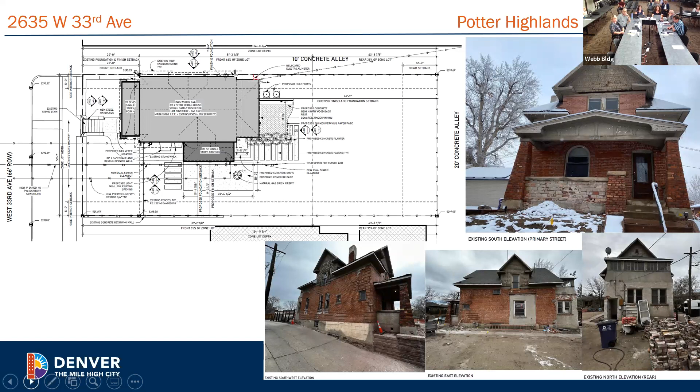Here you can see a site plan showing the location of the 1-story addition, as well as photos of the existing condition of the home. The commission previously heard the application on June 20th and asked the applicant for additional information about the proposed brick veneer.

Here you can see the proposed elevations for the alterations to the home as well as the addition. The applicant is requesting to make several alterations to the property, including replacement of windows damaged beyond repair, addition of a brick smear to match the existing damaged brick, and replacement of cedar shingles where damaged.

So additionally, the applicant is requesting to add a small 1-story side addition to the elevation of the contributing structure. The applicants will be demolishing a small portion of the elevation wall within the 1-story side addition. The portion being demolished is where previous alterations have occurred and is currently attached with new block infill.

The new addition will not damage the existing cladding material on the contributing structure. It will be clad in smooth composite paneling and stacked bond dark red brick.

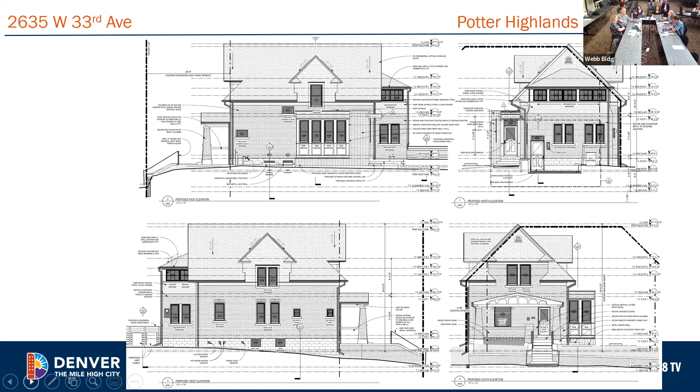Per the commission's request for more information, the applicant has indicated a type O premixed color mortar for the brick smear, which you can see here on the left. They've already tested it on the house, shown on the top left, and provided photos of the previous conditions and repair work already completed. The application also includes a history of this method, the various names it is known by, and the reasoning for why this was the chosen material.

Staff is supportive of the brick smear, and one thing we'd like to point out is that in the application the material should be called out on the materials page. That was a condition from staff, and staff is willing to ensure the material page is highlighted in red, and we are now working with this.

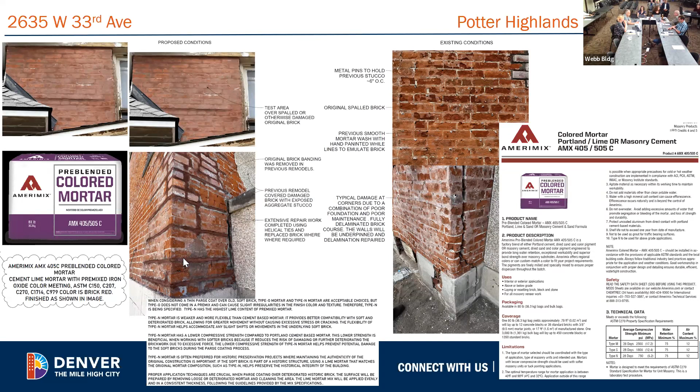Any other questions? Thank you. Now we can open it up for public comment if there's anyone here in person or online who would like to comment on this project. No. Okay, staff, Jesse, do you have any summary? Okay.

Then I think we can move into deliberation. What do you all think? I think first, thank you for all the helpful information. I know last time we were asking questions, and I think this answered a lot of the questions we talked about. So I'm curious to hear what others think, but I really appreciate you taking the time to do that.

Yeah, I was not in the meeting when we first saw this project, but I definitely appreciated the very thorough explanation of why this seems to be the best approach, and it kind of tracks with my understanding of best practices for preservation, particularly when you have very deteriorated brick masonry like this. So thank you.

I'm supportive of staff's recommendation. Agreed, I agree. Given the condition of the brick, there are not a lot of options to figure out how to address both the preservation of the original material and maintain the architectural character.

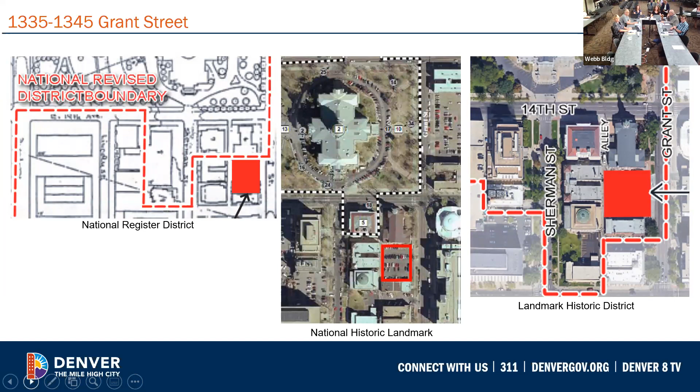Did you do it for me?

Okay, thank you. So the Landmark Preservation Commission previously reviewed a submittal for phase 1 mass, form and context on May 2nd, 2023, for a 12-story building that is shown on the left of the screen. The commission denied this application with the following comments. You stated that the application did not meet guideline 4.23, including building widths, stating that 4 to 8 story buildings stand on their own in this district, and this proposal does not. The commission felt that the application created a street wall that was out of context.

The commission also stated that a taller building could be constructed in this location, but the application needed to focus on the street wall and building space and massing issues. They also stated that the proposal blocks the sky from many different viewpoints, and that the design did not respond to the district. Stated that the design massing height needed to better fit within the context, and the commission recommended that the proposed building give space to the surrounding buildings in this district.

Many of you stated that the 12 stories was overwhelming in this location and cited specifically guideline 4.4 and 4.1 and 2. You cited guideline 4.4 for height and massing in the surrounding block context, and stated concerns over the impact on the individually landmarked church, and that the building could potentially overwhelm that individual landmark. You were supportive of the use of balconies on this residential structure, but recommended restudy of the balcony materials, potentially recommending the use of glass or a clear railing material.

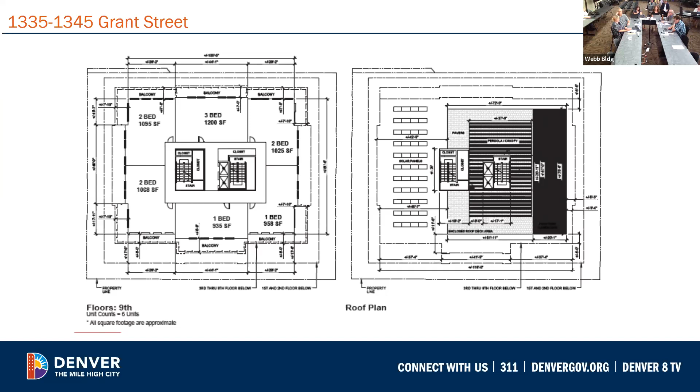The new building will be set back 10 feet from Grant Street, consistent with 1329 Grant Street, known as the Adams at Grant, and 230 East 14th Street, the individually designated First Baptist Church of Denver.

The building will have a 10-foot side setback from the First Baptist Church of Denver, and the Adams at Grant buildings to the north and south, fitting in with the range of setbacks in the immediate area. The new building will also have a 1 foot 5 inch setback along the alley, which fits within the range of setbacks in the immediate area.

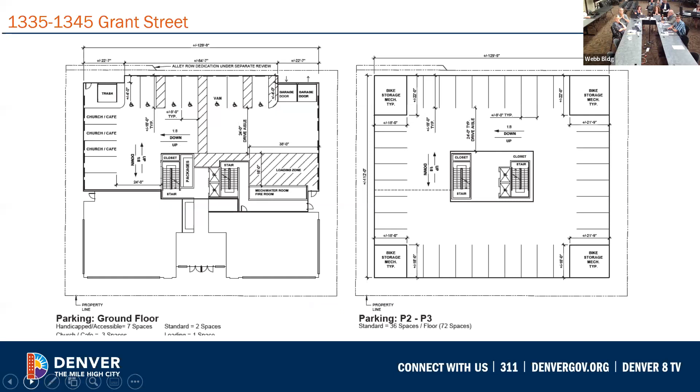Let's go through the floor plans again for your review: parking, ground floor, second floor, then floors 3 through 8, and then floor 9 and the roof plan.

The building is designed in the neoclassical style. The proposed design draws from existing neoclassical and Art Deco buildings in the district, particularly the strong vertical detail similar to the State Services building, cornice and horizontal banding, and classical elements like those found on the Colorado State Museum, and a prominent entry bay similar to those found on the State Capitol Annex.

The applicant has significantly revised their compatibility study so that it better illustrates where they're drawing their designs from and shows how they're trying to fit within that context. There are additional pages in the application packet showing this context study, but here are just a few of the images showing where they're drawing their design ideas from.

The new construction will be approximately 114 feet in height to the 9th floor, with a total of 9 stories. This is a reduction in height of 36 feet and 3 stories from the previous submittal. The applicant did include the height of the rooftop appurtenances, raising the total building height to 126 feet. They have clearly defined floors 1 to 2 as the base, 3 to 8 as the middle, and floor 9 as the cap.

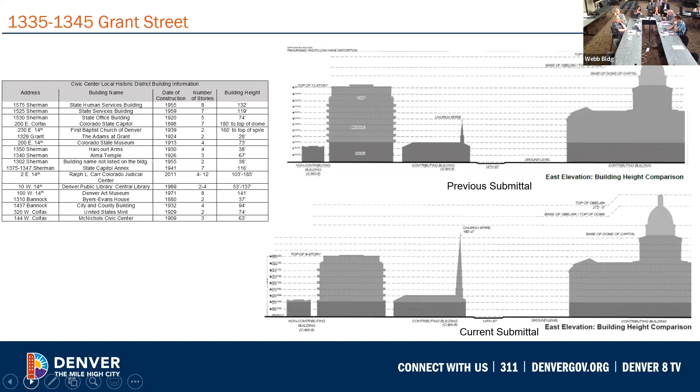Here you can see the previous submittal showing the height in comparison to other buildings surrounding the structure. On the bottom right-hand side, you can see the current proposal, which is significantly lower in height and better aligns with the street wall along Grant Street, and does not exceed the height of the steeple on the Baptist church.

So the East Grant Street side of the building facade features a glassy storefront first floor with anchored corners, while the second floor has a band of punched openings. The building base is broken up into 3 bays, including a central recessed entry bay with projecting canopy flanked by pilasters and storefront bays. The base is clearly defined and is capped by a cornice.

Staff feels that the proportions, height, and layout of the east elevation base better relate to the immediate surrounding context and provides more of a pedestrian-friendly scale than previously submitted.

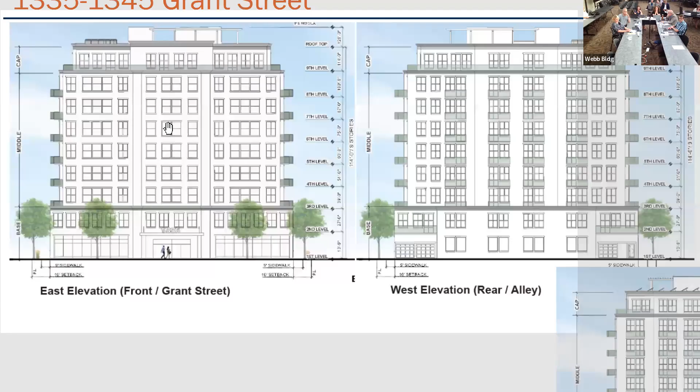The east elevation's middle features strong vertical detailing, punched window openings, regular window rhythms and layouts, and a clearly defined cornice typical of other buildings in this district.

The building's middle is set back from the base, approximately 11 feet 6 inches to 6 feet, providing visual relief from the building's base. The middle is broken into 3 bays with a central bay flanked by pilasters that align with the pilasters on the building's base.

The center bay is set back 6 feet from the building base, and the side bays are set back 11 feet 6 inches from the building base.

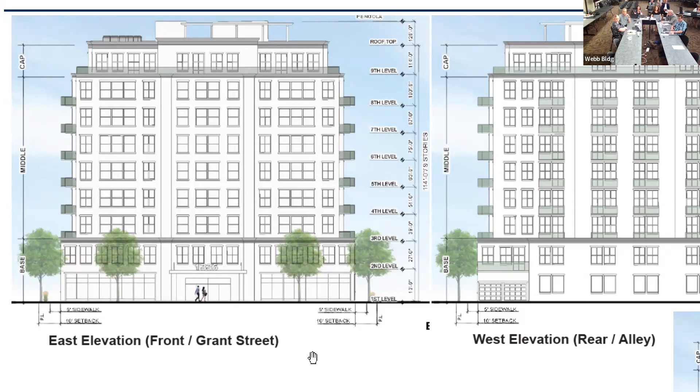The east elevation features single, paired, and triple window configurations, all of which are found in the district, particularly on the residential structures of this district. The applicant has redesigned the window proportions so that they better relate to the other window openings found in the district as well.

The building's cap is set back from the middle, approximately 8 feet 9 inches to 6 feet. The building's cap is broken into 3 bays with a taller central bay flanked by two side bays. The central bay is set back 8 feet 9 inches from the building's middle, and the side bays are set back 6 feet from the building's middle.

The building's cap features a cornice that wraps the building, and staff were initially concerned about the center bay stepping up in height, but ultimately we made the determination that after reviewing those building perspectives, the cap would have a minimal visual impact. It wouldn't be very readily visible from public vantage points because it's so high.

And the building's cap features single punch window openings and doors with proportions and rhythms that relate to the rest of the buildings in the surrounding context.

I'm just going to kind of group together the other three elevations to save a little time here. So the north, south, and west elevation bases are composed of 2 stories, matching the east elevation. The northeast and southeast corners of the first floor feature a partial continuation of the storefront windows seen on the east elevation, while the northwest and southwest corners feature garage doors.

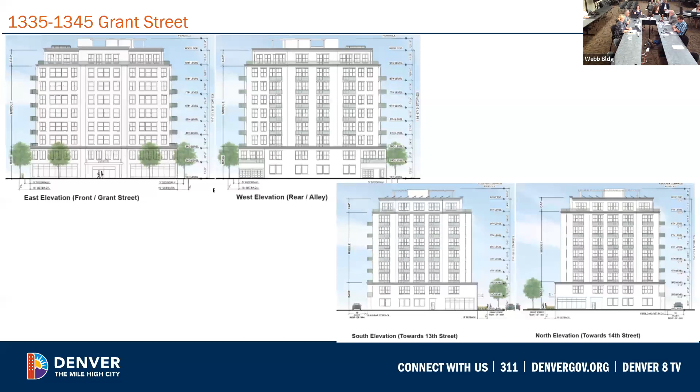So staff is recommending approval of the application, citing guidelines 4.1 to 4.5, 4.8, 4.22 to 4.28, 4.3, intent statements 4A, 4B, 4C, 4G, 4H, 4I, Denver Civic Center Design Guidelines 4C.1, 4C.2, and 4E.3, presented testimony and submitted documentation and information provided in the staff report.

Thank you, Jessica. Do you have any questions for staff?

I did have just one. Yes, ma'am.

I'm assuming that your recommendation for approving the application is for this phase 1. Correct. Yes, they will have to bring back phase 2 design details at a later meeting.

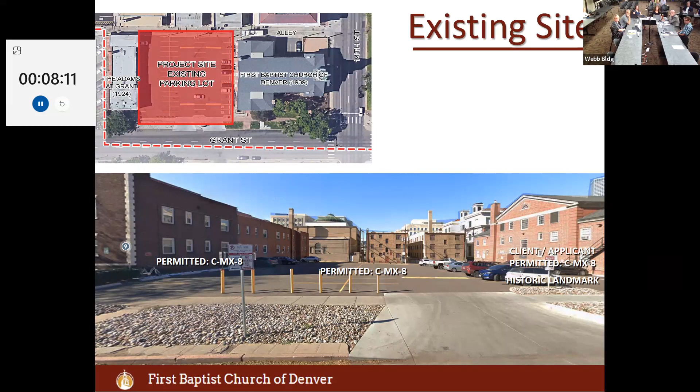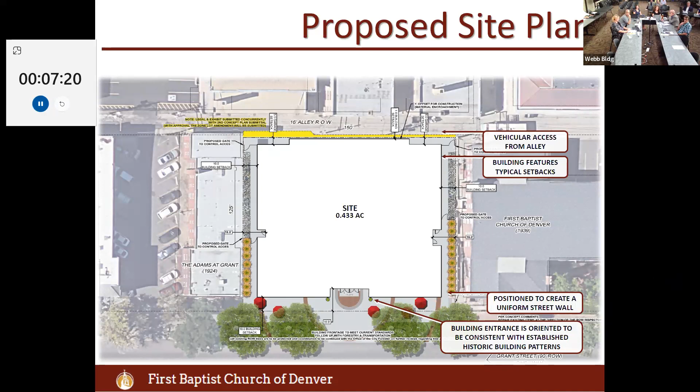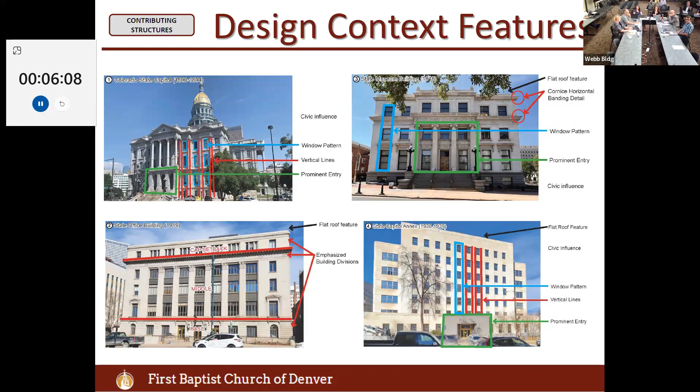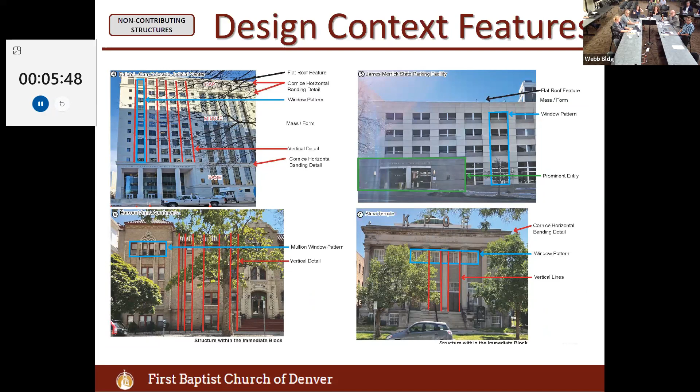Next slide, please. So these were some of the non-contributing, but they still provide design context with the vertical elements, the pilasters, the window mullions, openings, things we just covered previously. As we go to the next slide, you'll see how we overlaid those on top of the elevations. I think everybody in this room reads plans for a living, I've been doing it a long time. I still like 3D, but for the purposes of this slide, it's really helpful to see how those vertical elements work respective to those pilasters, punch windows, the horizontal banding with the cornices, our base facing Grant Street with the recessed entrance and the protruded awning, and then the activated street frontage along our building wall oriented toward Grant.

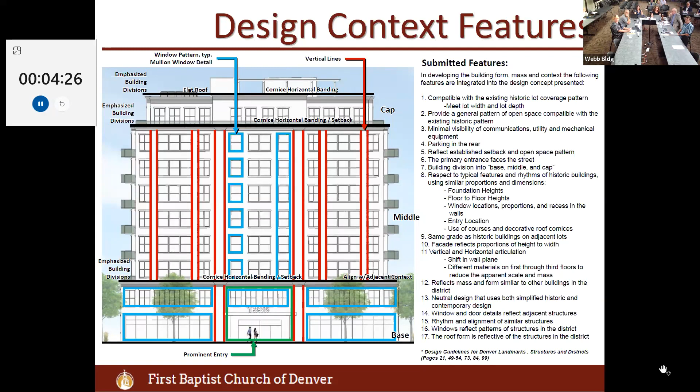Next slide, please. There you can begin to see that context of how the first floor is right up at the build-to line, but it's in keeping with adjacent properties, creating that defined building wall. The middle, which is 3rd to 8th floor, steps back, but the three bays discussed repeatedly through Jesse's presentation - you'll see how that middle and cap protrude, as does the entry. So it really plays to the simplicity, scale, and proportion of the building context.

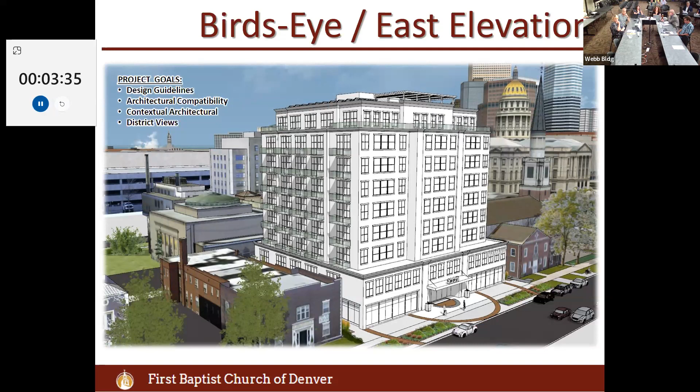Next slide, please. Here you can see how that building wall works with the streetscape. For the purposes of this presentation, we took out any street trees that would ultimately be there from a landscape architecture perspective, but the main thing we wanted everyone to see is how that recessed entrance is prominent with the pilasters flanking it, and then the store frontage on either side, along with the canopy that extends. With the scale of human beings walking along there, you can see how that two-story base really does work much better.

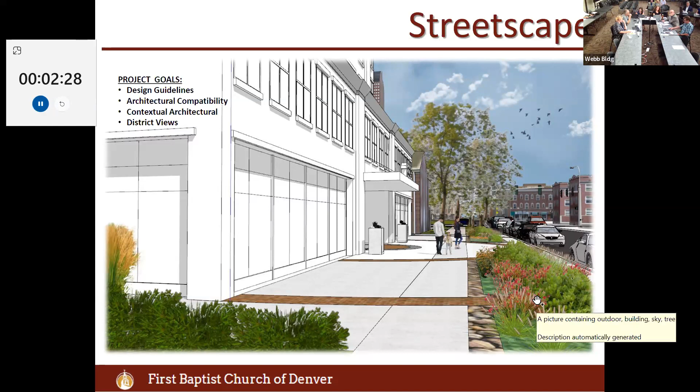And it's always disappointing when somebody doesn't like what you had, but frankly, your commentary from our last presentation to today, we took to heart. And I think in the end, it's a better project.

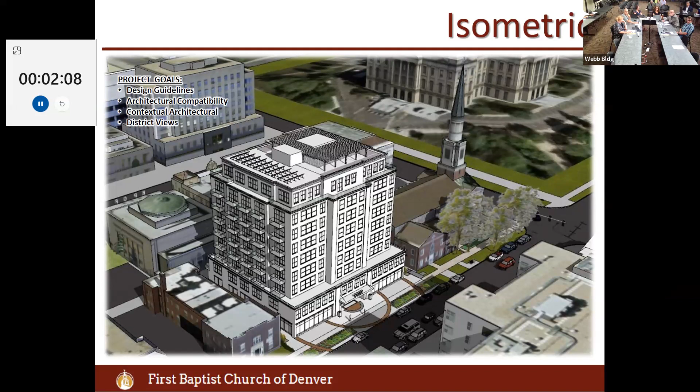Next slide, please. So here's a bird's eye view again, showing our rooftop and amenities up top, how the cap is recessed, the middle is recessed, and then the ground plane, how that's treated along the base of the building. Next slide. Then just looking through the neighborhood, how it feels better, not overwhelming, and works a lot better with the neighborhood.

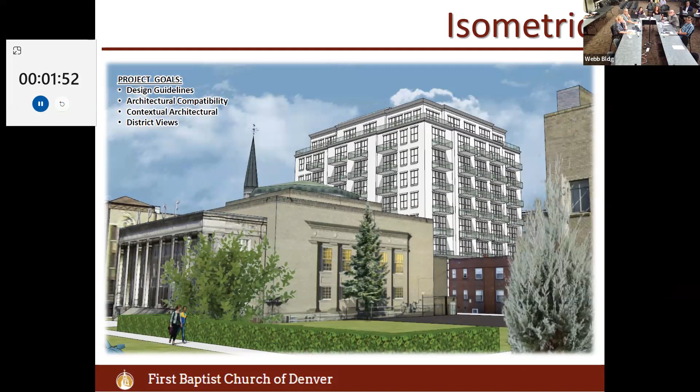Last slide, please. So thank you for everyone's support, and hopefully you'll look favorably upon our proposal here today.

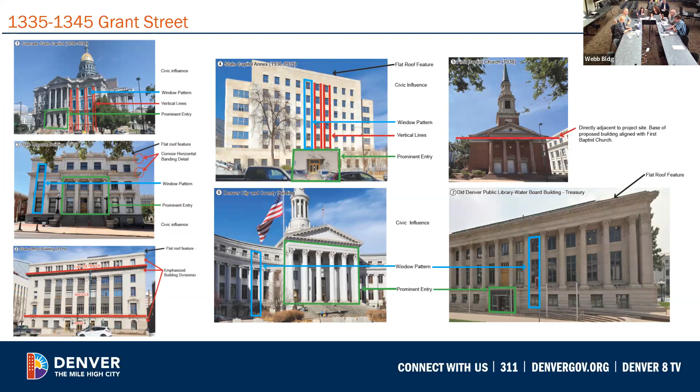Yes, and I would just further elaborate on staff's review of these different iterations of the design. There was a conversation about the setback which you see on a lot of residential structures. But we felt that they were providing great massing by shifting the side wings back, and it would relate both to those institutional structures as well as the residential structures, breaking up the massing of that base street wall front.

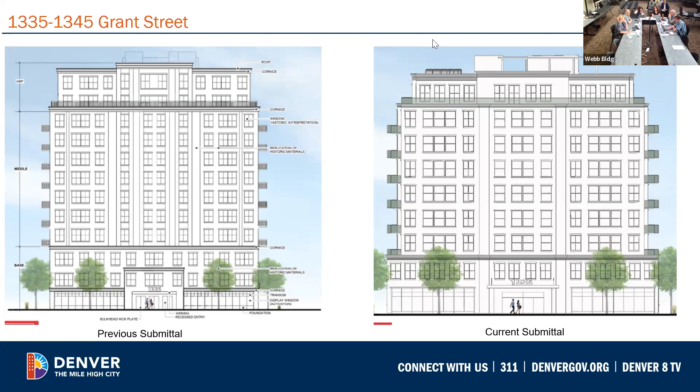It ties into a lot of the proportions that you find on almost all of the buildings in the district, and it breaks up that massing of street wall so that it is more pedestrian friendly. And it helps to scale the building, even though it's much taller than the surrounding buildings, to better fit the immediate context as well as the overall context of this district.

I would add, building on what Brittany said, that the district is primarily made up of institutional buildings. If you look at the scale and massing of those, they're even more monolithic than what the applicant is proposing here on this site.

And so in that context, I find it hard to look at the existing buildings and tell the applicant that they can't achieve the same mass if it's articulated slightly better at the corners, which this application does. So they have the ability to build it by right. It's kind of an uncomfortable position for me to tell them that they can't.

I think you raise a good point too, in that this is a project for affordable housing that I think we're all in support of, but of course that isn't our purview, the use of this building. But by the same token, neither is it, whether it's residential or office or institutional. So I think that builds onto what you're saying, as far as this blends into the institutional context that we see with these other buildings.

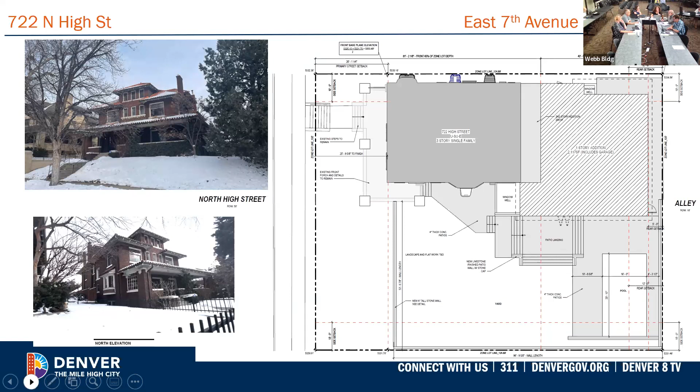Here you can see the proposed site plan. The applicant is proposing to add a 2-story rear addition attached to a large 1-story addition, and it will also include an attached garage. Additional changes to the site include adding a 6-foot rear yard wall, new walkways and patios, and a new pool area, as well as window wells.

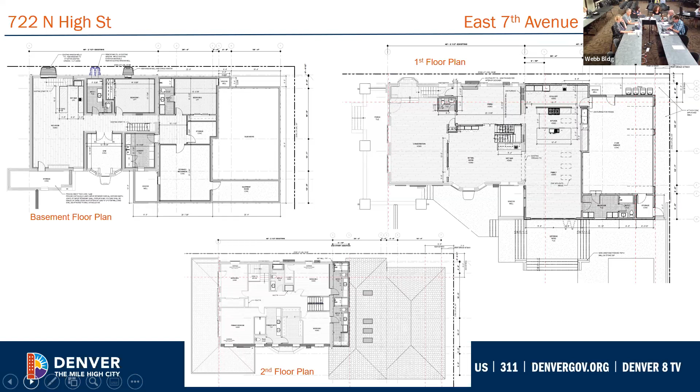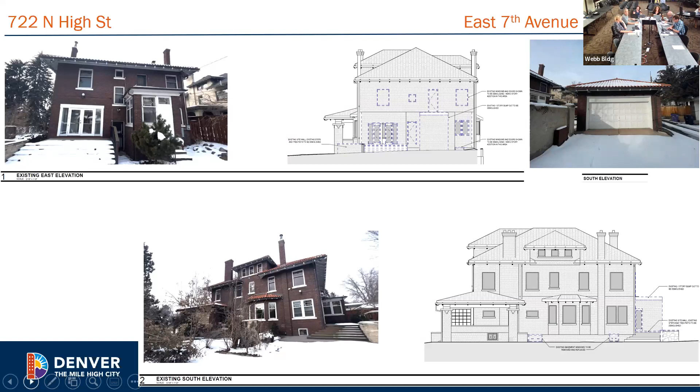Staff did have quite a bit of conversation around this material and felt it was not appropriate. One, because this material, while traditional, is not typically found on residential structures, especially not in this district. We also felt the scale of the material was not appropriate and would not blend in with the existing context.

Staff would also like to point out that the red roof tile is proposed to match the primary structure, and the applicant believes this is a modern contemporary style that fits within the existing historic context by tying in the use of that tile roof. But as you've just heard, staff did have concerns about that limestone material.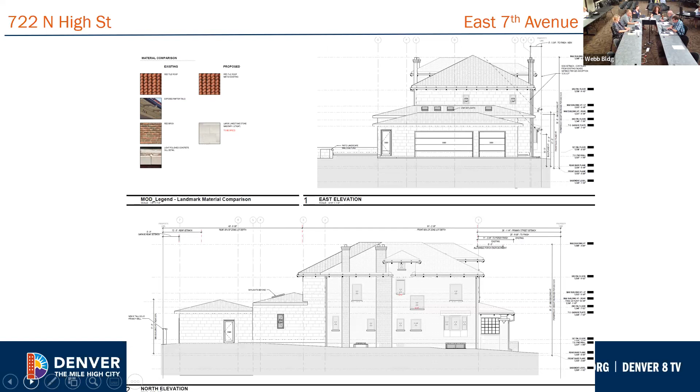Since the new proposed rear yard wall is also proposed to be clad in this white limestone towards the front of the lot, staff also had concerns with the visibility of that material there and voiced concerns about its appropriateness and use, again, as this is not a traditional material found in this district.

Staff made the applicant aware that all manufacturer material specifications are needed and need to be added, and added this as a condition to the application, to the staff brief.

Overall, the addition and site work changes are subordinate to the primary structure, though the material proposed is not common to the district. Therefore, staff is recommending three conditions to better meet the design guidelines: that they provide manufacturer specifications for all new materials, windows should be wood or aluminum clad wood with a minimum inset of 2 inches, and that a more traditional material be selected for the proposed wall and addition cladding.

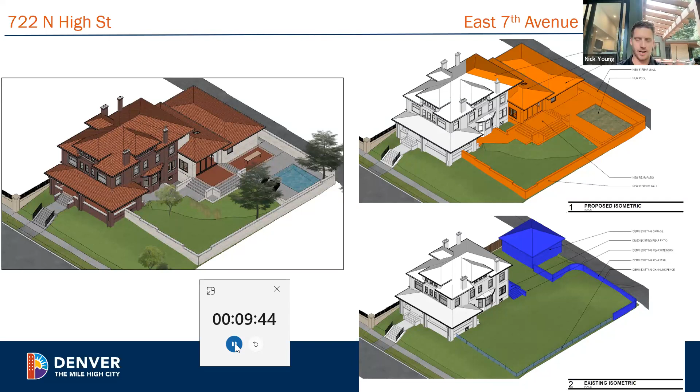I think, even though you were reading notes, you did a pretty good job presenting the scale. I'll piggyback off that a little bit so everyone can understand the context. I want to reiterate, the existing home is a 3-story home, and we did propose a 2-story addition. What's on the screen, I think the top right corner represents it best, the axonometric showing the second story addition for about 7-8 feet there.

It's about a 200 square foot addition off the second floor. And then the 1-story addition below, really what influenced the footprint was the existing facade width as well as the existing front porch width. So we were really trying to stay along those parameters with that 1 story.

And we also had some challenges with that 1 story. Our finished floor elevation is quite a bit higher compared to the street elevation, about 5 to almost 6 feet higher than, let's say, the sidewalk there. The lot also slopes considerably from the northeast corner to the southwest corner.

So I think that'll be relevant to our conversations here soon regarding perspectives of the general public from the primary street. That being said, we did want to keep that first level addition at the same datum as the finished floor, just to minimize interior elevation changes and stairs. So that's why you will see some exterior stairs and landscape design along with the pool.

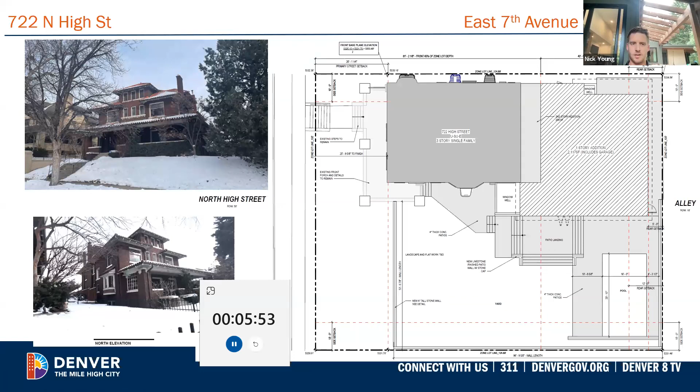We've done some really nice renderings with the landscape architect, as I mentioned. I want to make clear that before the limestone was identified as white, but that's not quite the case - it's actually a very neutral color, not stark white at all. It's more of a play off the existing sills and capstones found throughout the existing home, which is why we leaned toward this limestone in the first place.

We were really trying to find balance between hitting standards relative to 3.4 and the design standards compared to 3.5. For 3.4, it seems like contrasting materials aren't preferred. So I think to make this successful, we should choose a limestone with a very neutral tone, and perhaps a similar grout color, because this 2D drawing can be somewhat deceiving.

Those grout lines really pop in this 2D black and white drawing. In reality, if we choose a very similar grout color, this will wash out more, similar to almost a stucco finish, seen as a holistic material but more detail oriented in finish - whether the texture and dimensions of the limestone compared to if we explored a stucco finish.

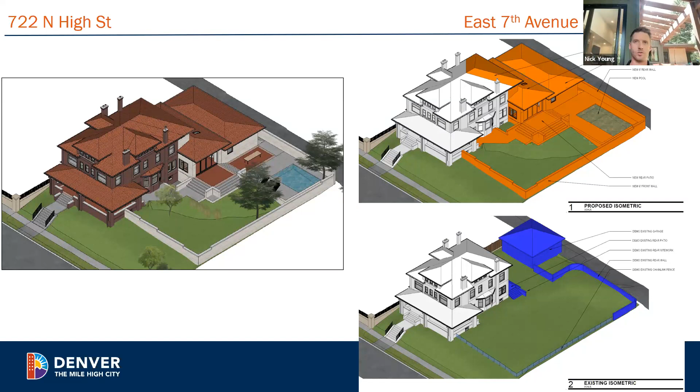I have a question. The limestone you want to use - you've indicated it's 12 inches tall and 24 inches long. How thick is it? Is this a standard 4-inch veneer, or more like an applied tile? It's going to be applied - we're looking at different thicknesses. There's a company that provides a custom product we're looking into. What we're starting with first is really that application, but to answer more bluntly, 3/4 inch is what we're looking at the moment.

Okay, thank you. Any other questions? Okay, thank you very much.

We'll move on to public comments if there are any for this project, either in person or online. It looks like we have one.

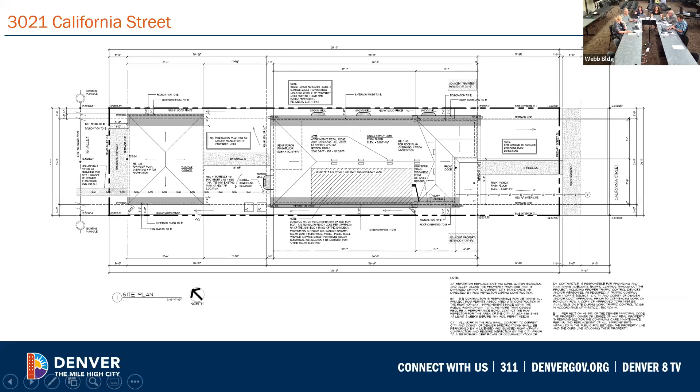This single family home will have a basement, with egress windows on the north side of the property. The first and second floors are the habitable spaces, and then just a 1-story garage.

The roof form is a little complex here. It is a hip roof with a projecting side gable and a side gable with a forward gable in it, meant to mimic some of the roof forms you see in the Curtis Park Historic District.

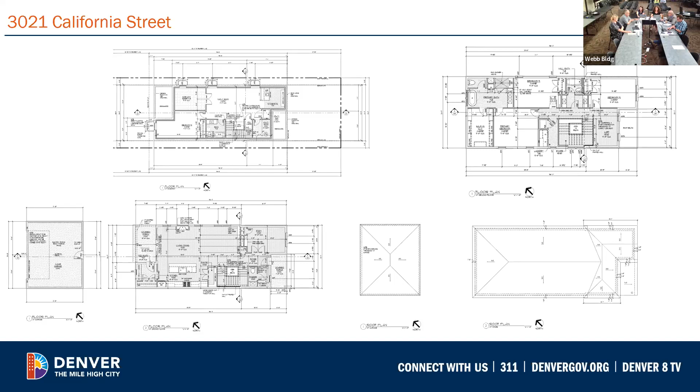Staff are supportive of this roof form, and the roof will be clad in asphalt shingles for both the primary structure and the garage. So here is the front facade and the south elevation.

This property will be clad in a red brick. It's the ballpark brick that you see here on the screen.

Within the gable face of the forward facing gable, the applicant initially proposed fish scale shingles, which is in your packet today. Staff made a condition that additional details be provided on the reveal of the shingle. Since then, staff and the applicant have spoken, and the applicant is going to change the profile to a round shingle with a 5-inch reveal.

Staff are supportive of this change. However, we're still recommending this as a condition on the approval today, as that change is not before the commission today for review.

Specifically, the shingle material is the true wood product the commission has approved before. However, we typically require this product to be cut along the natural shingle edge, and that is noted in the application materials, so we did not include that as a condition.

The front facade, again, will be clad in brick and will have a dogtooth detailed course separating the first floor and second floor, and then a concrete foundation with that raised foundation typical of the Curtis Park Historic District.

Here you also have the front door, which is a 2-panel solid door, and it's going to have a transom above. This is a custom stained glass transom.

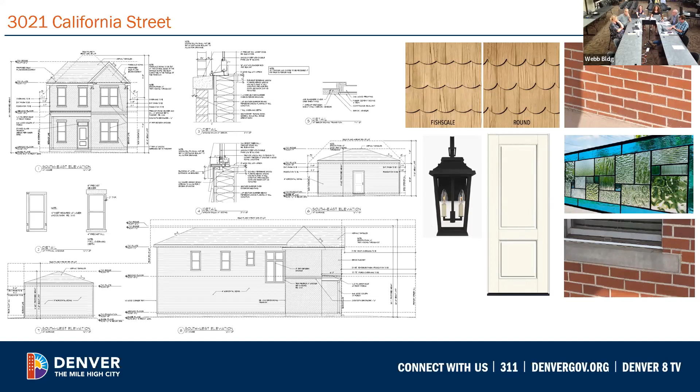Here on this elevation, you can also see an image of the proposed light fixture. There is a lighting plan in your packet, but I didn't see specifically where the front porch light would be, so I do need additional details on that.

So here are the rear elevation and the north elevation. Not much has changed in terms of these elevations. Again, that brick will be wrapping the primary structure and then transitioning into a lap siding.

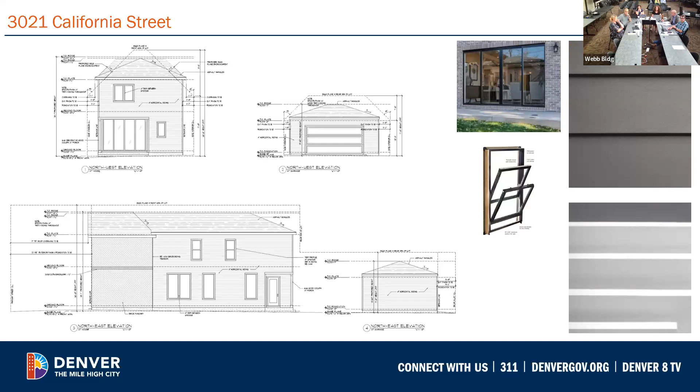On the rear, we have an aluminum clad slider door, and you can see the proposed smooth finish fiber cement that is proposed for both the primary structure on the secondary facades and all the elevations of the garage structure. Here are some renderings of the proposed infill project.

We don't have color renderings of this specific project, but that's not something we necessarily require, so staff are recommending conditional approval.

My original condition was to confirm the fish scale shingle be between 4 and 6 inches. I would still recommend that as a condition, just change it from the fish scale to the round shingle that True Wood provides. And then additional clarification on the light fixture locations on the front facade, as I did not see that called out in the elevations, but I did not include that in my original motion.

That's it for me. Thank you.

Are there any questions for staff, commissioners?

Brittany, I thought you had also at the very beginning of your presentation noted something about this. Yes, I'm sure the fence location is noted on the north side, it's just sometimes hard for me to read with the property lines, so additional clarification would be helpful.

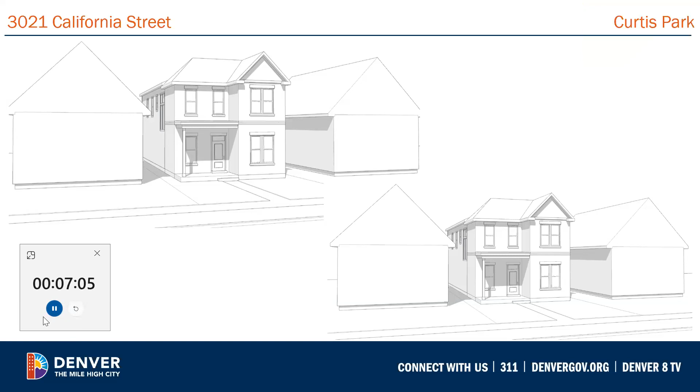Could you give your name and address? I don't think we caught that. Yes, I'm sorry, I'm Dawn Burnley with Design Edge Architects, 482 South Broadway, Suite 100, Denver 80209.

Commissioners, do you have any questions for the applicants? Okay, does it look like we do? So we can now open it for public comments.

I will just mention that we did receive a letter of support of this application from the Curtis Park Historic Neighborhood Association. It looks like we have Keith joining us. Keith, if you would begin with your name and address, you have up to 2 minutes. Great, thanks, Keith Pryor with the Curtis Park Design Review Committee, 2418 Champa Street.

The applicant's been very receptive to our comments and changing out the upper story shingles to be that which is more applicable to the district and gives that more traditional actual feel of the Queen Anne. This has been a great project, and we feel the materials they've chosen work well, and they have made those changes we had requested, and we ask that the commission support this application as presented.

Thank you. Thank you. Any other public comments?

Okay, so staff, any recap that you'd like to make?

Yeah, the relocation of the AC unit, that's something we would normally do administratively, don't have major concerns over that.

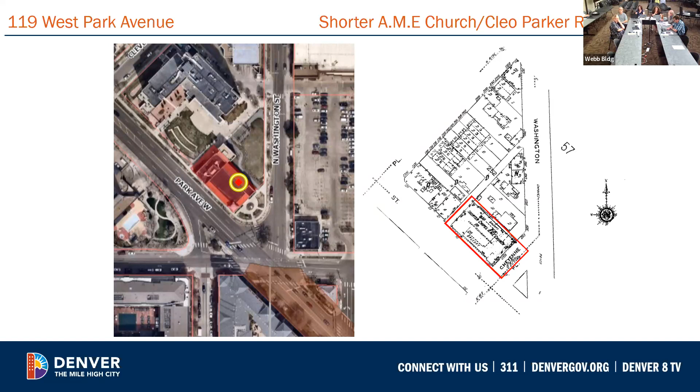So here is the historic church. This is historically the Shorter AME Church. It was named after one of their pastors when they built the structure. It was founded by 2 women.

This is not the church's original location, and this is not the original structure in this location. This specific structure was constructed in 1925 after the structure on this site was destroyed by a fire started by the Ku Klux Klan. This 1925 church was constructed between April, when the fire was started, and finished and completed in December of that same year, with generous support from the community. So this church is designated for its architecture, geography, and cultural significance.

It was one of the largest sanctuary structures at the time it was constructed. The church has been the home of Cleo Parker Robinson Dance since 1987, but Cleo Parker Robinson Dance was founded in the 1970s. Cleo Parker Robinson herself is noteworthy; she was inducted into Colorado's Women Hall of Fame in 1989.

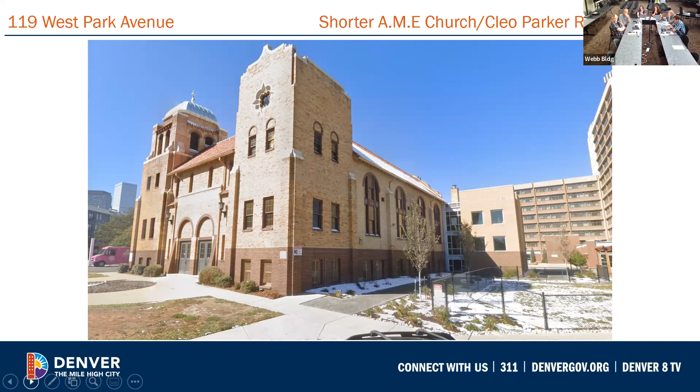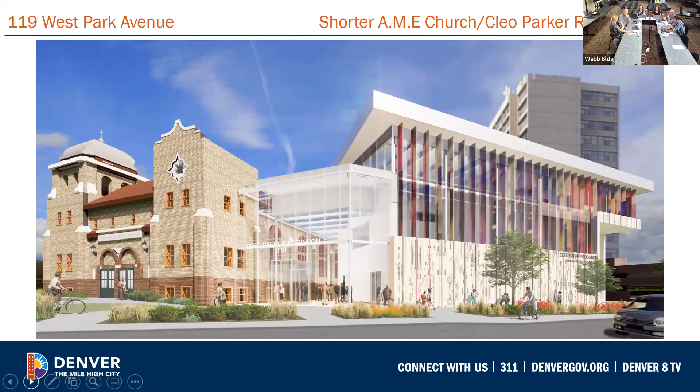In this image, you can also see the existing non-historic addition located at the rear, and this is generally the facade that the addition will be added to, the front elevation of the existing structure. Again, this is for an addition to the structure to allow Cleo Parker Robinson Dance, which is now a Center for the Healing Arts, to be located in and continue to use this space.

The proposed addition is a glass lobby addition that is double height. The dance studio's new theater space will be on the north side of the site, which is well outside of the landmark boundary. So our purview is limited to the connection between the addition and the existing historic structure, and alterations being made to the existing historic structure.

However, I don't think the interior connection will currently change. We would like some additional details on that, but again, it's a non-historic addition and not within the boundary. We're more concerned with the connection details. The new addition is proposed to provide ADA accessibility to the entirety of the historic church structure.

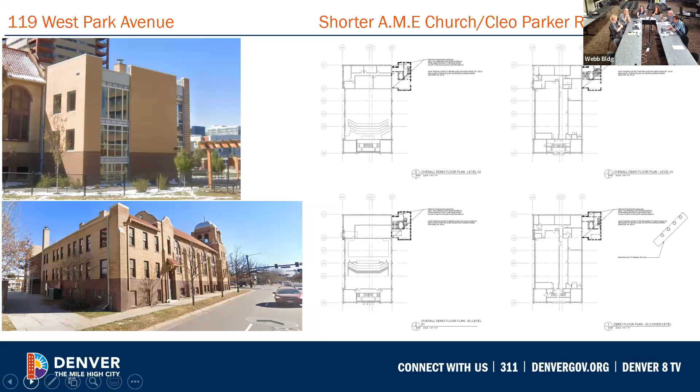It is set back from the primary entrance, and staff do not feel that it takes away from the primary entrance of the church. It's rather quite understated. So we do feel that that's appropriate, as our guidelines do talk about retaining the original primary entrance.

Again, principally a lobby space, and the connection between the historic church and new addition is going to be a minimal butt glazed joint, which I have details of on the next image. Then at the rear, where the existing addition is, that is where the ADA accessibility will be added with a new elevator and stair spaces. The other portion, which is outside of the commission's purview, is new theater and classroom spaces.

So in terms of the roof, again, this is a glass skylight connection. It is tucked just underneath the existing historic tile roof of the church, and I do have a detail of that as well. So we'll just move on to the elevations.

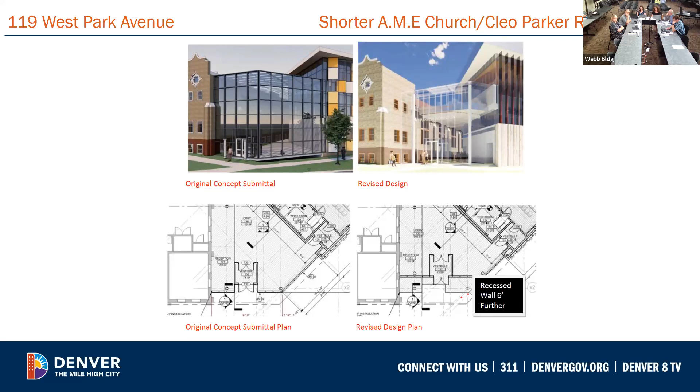Staff did recommend that the addition could be set back further to relate better to the architectural massing and scaling of the existing building, behind the Belfry Tower and this second set of buttressing. But the applicant feels strongly that the proposed programming and setback they are presenting today is the best solution for their programmatic needs.

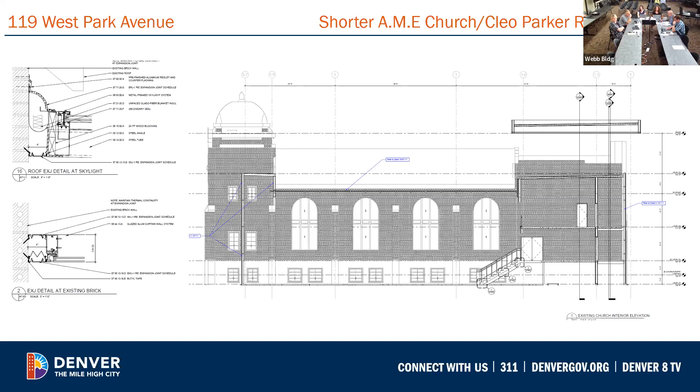Here are just some renderings of the addition. Staff are generally supportive of the addition and its use, as we feel the ADA accessibility and continued use of this space by Cleo Parker Robinson Dance for the Healing Arts is very important, as it is a legacy built business within this space and has historical significance for how long they've been an institution in the neighborhood.

But we are recommending that the front facade of the addition be set back behind the Belfry Tower massing or the second set of buttressing. We were also asking for additional details on the modification of the existing non-historic addition, so we're clear on what will be changing there in terms of the connection details.

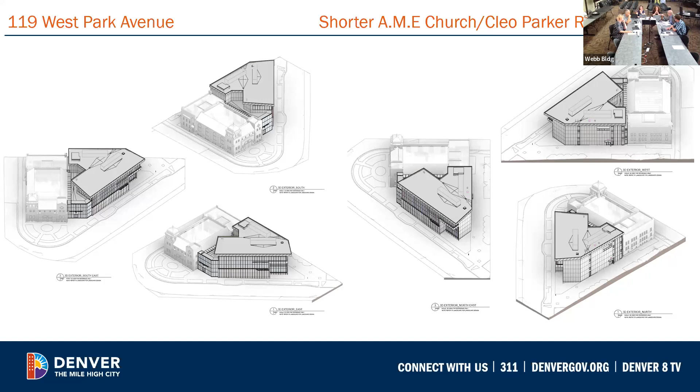I'm a little confused. It appears to me that that addition in the back is going to be demolished. Is that your understanding as well? I think that is a great question for the applicant. If it is to be demolished, does it change the staff report in any particular way?

No, because it's a non-historic addition, we're really just more concerned about the connection details there than anything, as that's our purview. So I feel comfortable if it's also demolished, it's just wanting to look at those connection details. The condition does say for demolition.

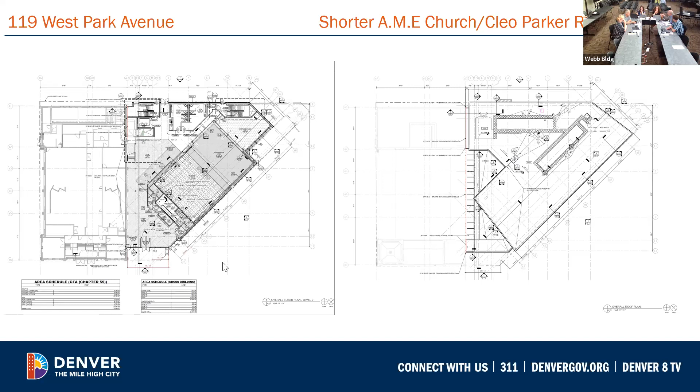You made a comment that once the addition is done, the facade that's enclosed is no longer under our purview. Can you explain what that's about? Yeah, so it'll become interior, and our purview per the ordinance is limited to exterior alterations that require a building or zoning permit. If the commission approves the current placement, the belfry tower, this section, and the roof will still be within our purview, but essentially the north elevation will no longer be within our purview because it's an enclosed interior space.

The applicant, both the owners of the building and the architect, have indicated to me that no changes are proposed for that elevation.

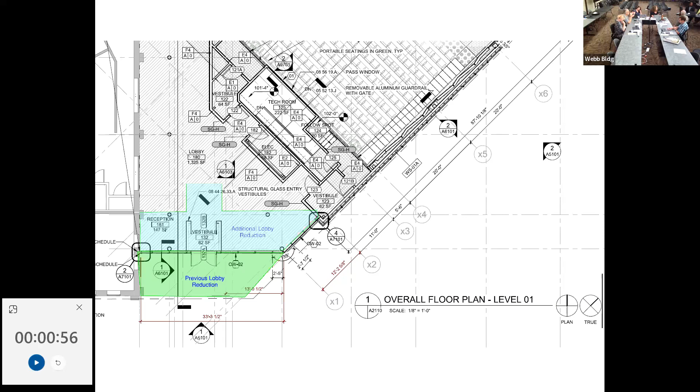Okay, and then what's the curtain wall system? Is it extruded aluminum? Yes, it's extruded aluminum. We have a butt-glazed horizontal and capped vertical, so mostly clear.

But not all glass. Oh, it is all glass. Not like a Pilkington. No, we're butt glazed horizontally, and there will be caps vertically.

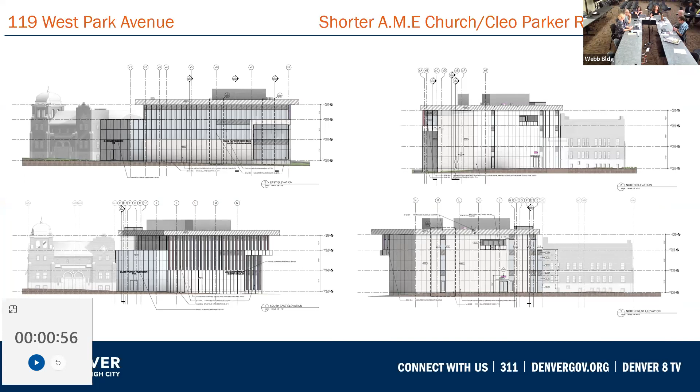Okay, thank you. We'll move on to public comments. As noted, we did receive a letter of support from Historic Denver. Do we have any others on the call who would like to make a comment?

Yeah, Corbin. So Corbin, if you would begin with your name and address, and you have up to 2 minutes. Corbin, if you're speaking, we can't hear you. Corbin, is that any better? Yes, oh, we can hear you now. Okay, yeah, I got a prompt to join as a panelist, so maybe that changes everything. All right, hello, everyone.

My name's Corbin Pugh. I work for the State Historical Fund, 1200 Broadway, Denver, Colorado, 80203. And yeah, I'll be very quick. I just wanted to say the State Historical Fund granted money to Shorter AME back in 2006, which resulted in a 20-year covenant with the state. And that's just a measure to protect the state's investment in this building.